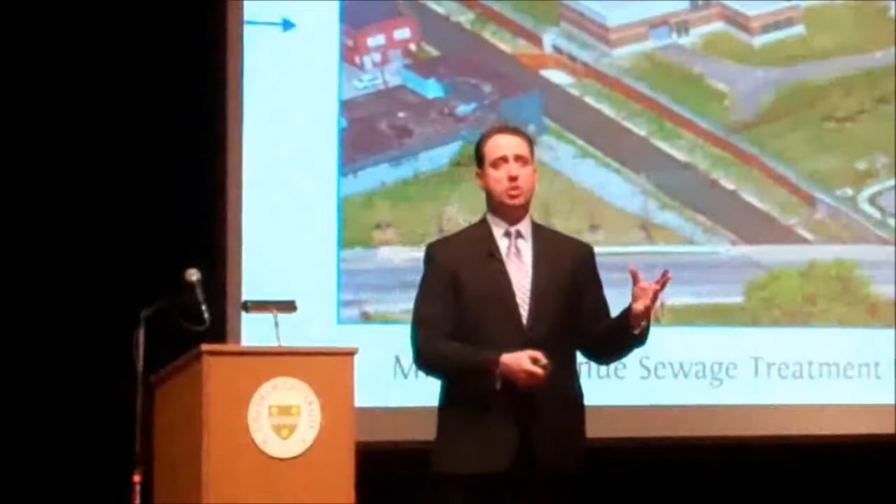This is not a decision that was made quickly, and this better way forward really came from the county executive serving as a city councilor in the early 2000s and late 1990s, where she strongly disagreed with the county's plans to build wastewater treatment facilities. These facilities are very expensive, $70 to $120 million.

I'll show you what they look like on the inside. The two circular areas are swirl concentrators, which is where they would swirl out some of the icky stuff that might be in the combined sewer overflows during wet weather events.

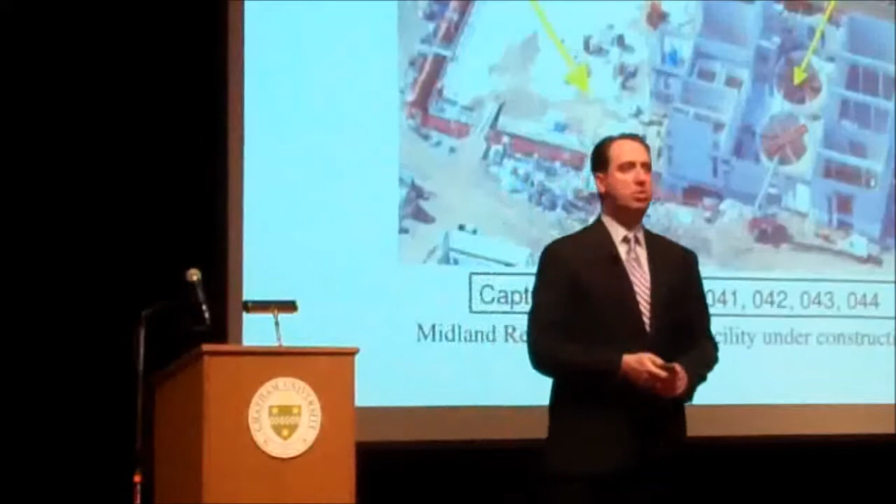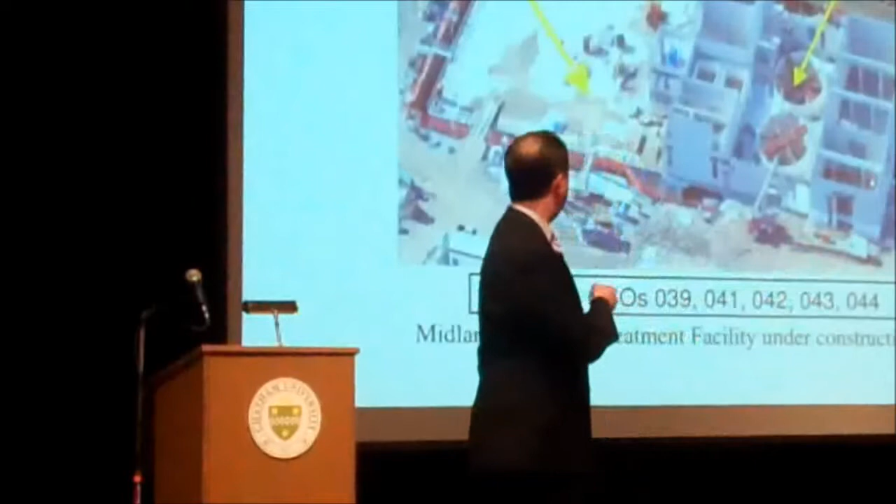And then the tank to the right is where they would dose it with chemicals and then discharge it into receiving water, which you can see right out here, which is Onondaga Creek.

So this one was constructed. We have a controlled subject. We can see what our future was, and here it is along Onondaga Creek, and this is what the conveyances look like that needed to be built to go to it.

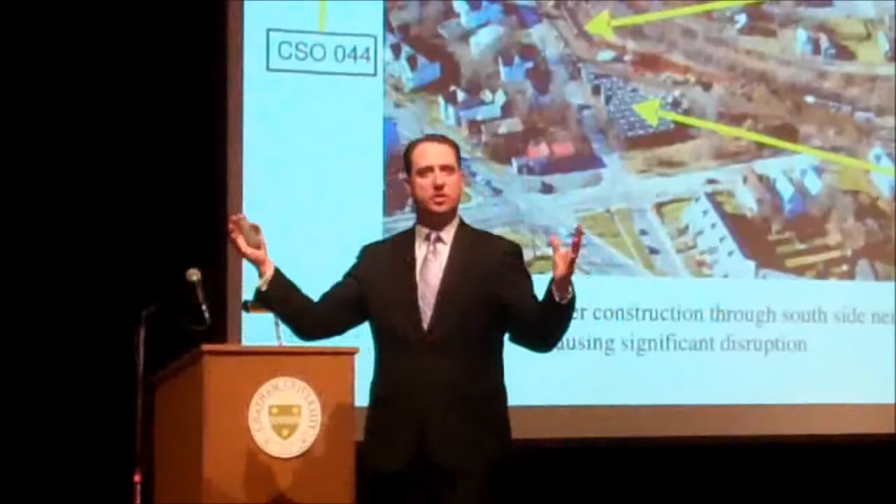Large conveyances, 12-foot diameter conveyances, had to go through neighborhoods to close off the CSOs and transport the wastewater to that treatment facility. This was very disruptive to this community.

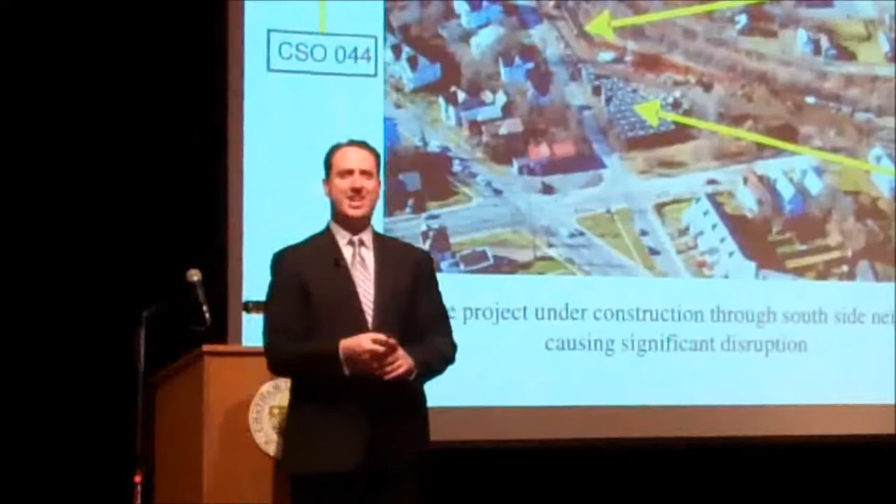The bedrock was so hard in places that they had to use dynamite to free it up and create the space for the pathway. And the county executive, when she came into office in 2008, said, enough, I don't want to build more of these.

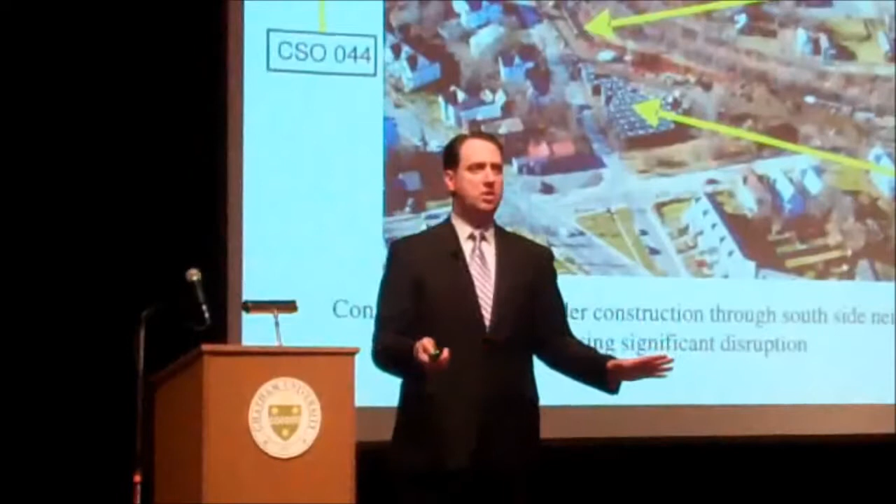One had been put out to bid in 2007 while she was running for office, and the contracts needed to be signed by January 4th in order to advance the $100 million construction project to go forward.

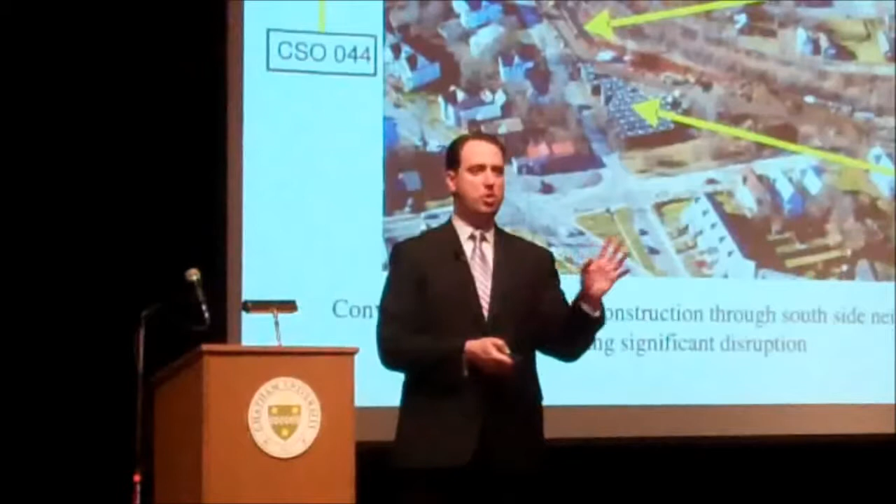I'll show you where it was a little further. She decided on her 4th day in office to not sign those construction contracts and petition the courts to find a new balanced gray and green approach to deal with our combined sewer overflow issues in the city of Syracuse.

So now our challenge is to really look at the gray and the green. I think it's very important, and this is why I put this presentation together this way, and I get to give it all over the place and talk about it.

The gray component is still very, very important to our success as a community. Anyone who suggests that green infrastructure is going to solve all the problems is really missing the importance of the gray components. And that really starts with smart gray investments that made our green program, which I'll get into, possible.

We made significant investments in our wastewater treatment facility. $173 million was invested on advanced phosphorus and ammonia removal. And that really positioned us.

At the time, we were very fortunate to benefit from things that we don't hear about anymore. I was talking to our friend from the Congressman's office here about potential federal funding. We funded this with an earmark. And I bet you we all wish those were around sometimes.

The greater good, I think we're better off because they're gone. But at the time, Onondaga County benefited from a very generous earmark to fund this improvement project. We were able to put it in place.

It's working now. The lake has recovered from phosphorus and ammonia contamination much faster than models had ever predicted. And we used this investment as an opportunity, the benefits of this investment, as justification to go to the courts and petition them to do a new program where we were able to suggest a gray and green combination rather than just the wastewater treatment plants that I showed you.

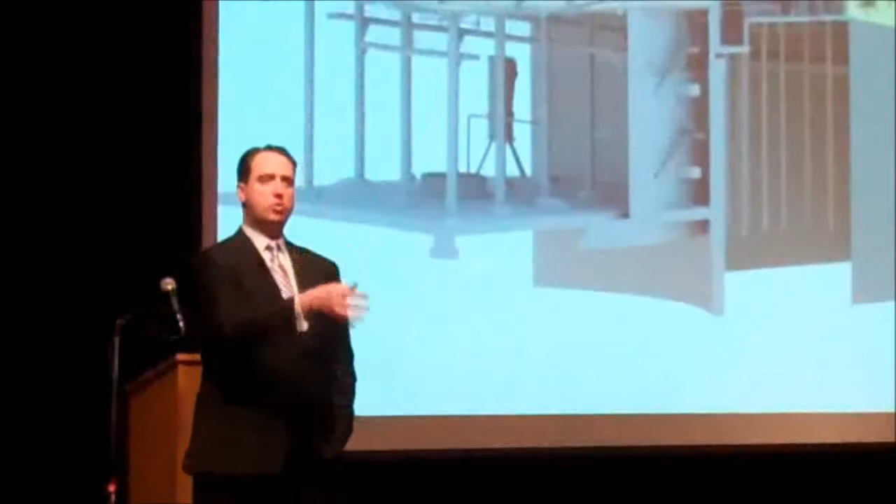This is in an area we're building now where we would have built one of those sewage treatment plants I showed you earlier, but instead we're building this underground storage system where we'll get 4.5 million gallons of the first flush of a combined sewer event through. We'll store it here during the event, and then when there's capacity at the wastewater treatment plant, we'll convey it down where it'll be treated with advanced ammonia and phosphorus tertiary treatment.

So these will store a lot of stormwater on a per-event basis, and this combined with a larger facility of 6 million gallons where we're doing a $70 million investment. I'll show you this picture.

This was an old parking lot, but this is where the third regional treatment facility was going to be built. My boss doesn't call them that—she refuses to. She calls them sewage treatment plants, and for all intents and purposes, she's absolutely right. They were sewage treatment plants.

This is the city of Syracuse's commercial corridor, where we have a Museum of Science and Technology. This is mixed-use housing, all retail, restaurants, a new hotel, a landmark theater. She just thought it was a bad idea to build a sewage treatment plant right next door to this commercial corridor that we invested all this time and resources in to build.

So instead, we're building this relatively significant 6 million gallon subsurface storage system. There'll be a pump station here, a control station here, and we're also working to implement green measures at all of our gray infrastructure projects when we can and when it's cost effective.

We want to make sure we're using the same principles on the green side that we're using on the gray side. We're going to capture all the stormwater that hits this site once it's restored, store it down here, and use stormwater to flush the system out after rain events.

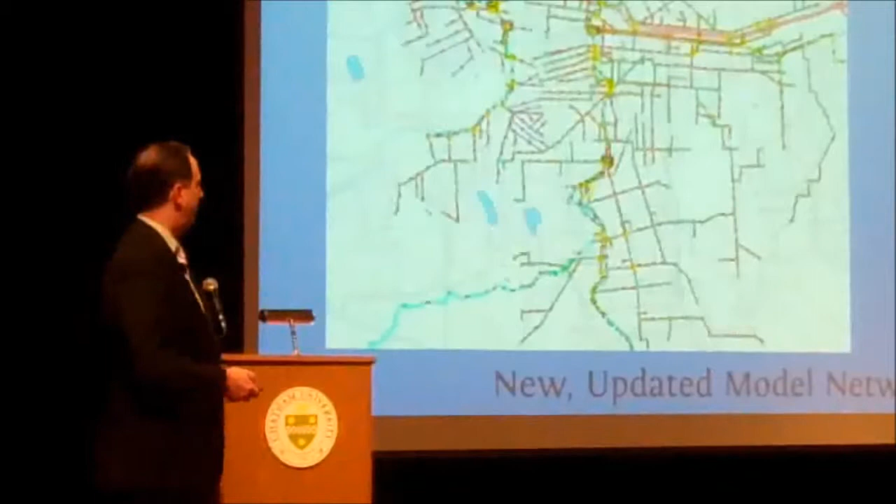We've enhanced it by adding additional data points, and now you can see that instead of - and we use the term node, but really that means data points, manholes, extensions of the system - so now rather than having 503 data points that drive our model, we've got 1,807, and we now look at our system as 456 distinct hydrologic subcatchment areas instead of simply 94.

Gets us to a level of granularity where we can really start to make water quality decisions based upon how water works within the footprint of our community.

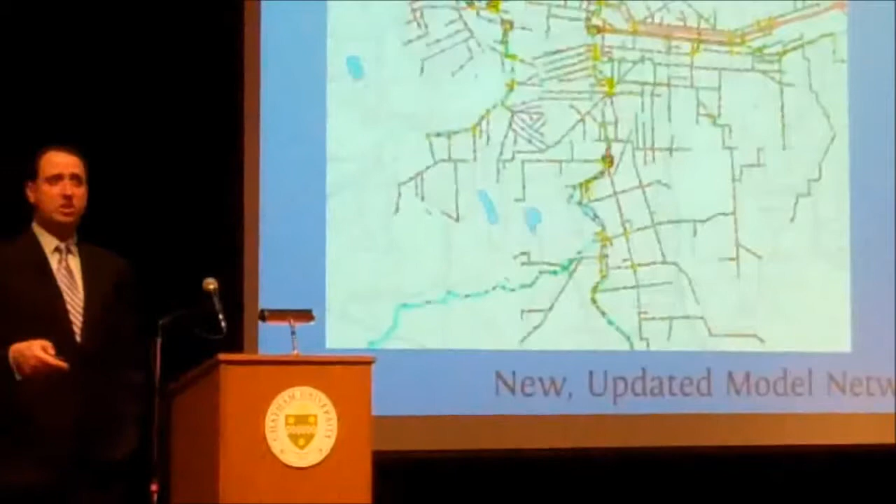We use georeferencing, USDA soil data, as well as impervious surface cover, which I'll show you here. So this shows the subcatchment areas - these are all subcatchment areas, which water behaves in a certain manner within that subcatchment area. And then this shows impervious surface in the city of Syracuse.

If you overlay them all together, you can start to prioritize where green infrastructure is more effective or less effective. And that's something that we've just gotten our arms around in the last few months.

So what I'm going to show you following this is what we've done leading up to this modeling discussion. And I'll get into a little bit how we plan to adapt our program to this technology now that we have it and we can use it to our advantage.

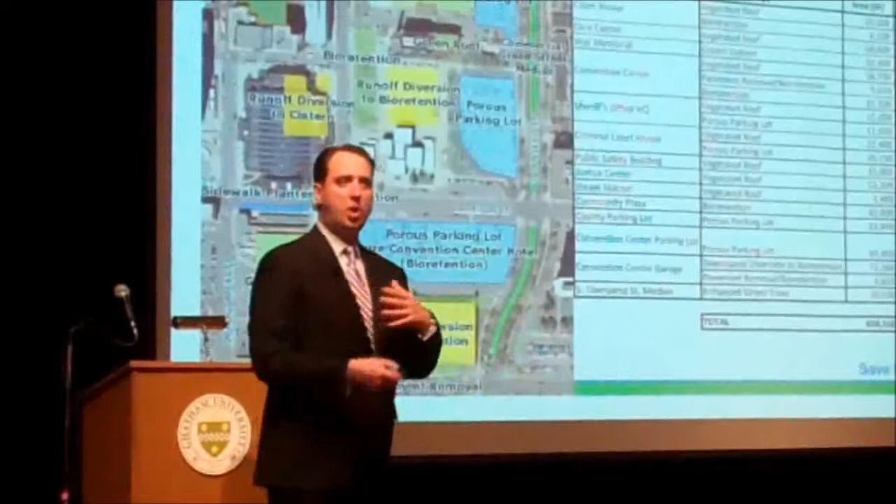So we started with a simple idea. We went to a federal judge in 2009, and this slide was in the presentation given to the judge. What we said was, what if we looked at this small slice of the city of Syracuse, where most of our municipal buildings are, owned by the county, parking areas owned by the county. What if we implemented these simple green infrastructure technologies here? Look at the effect we can have in a very small footprint within our city.

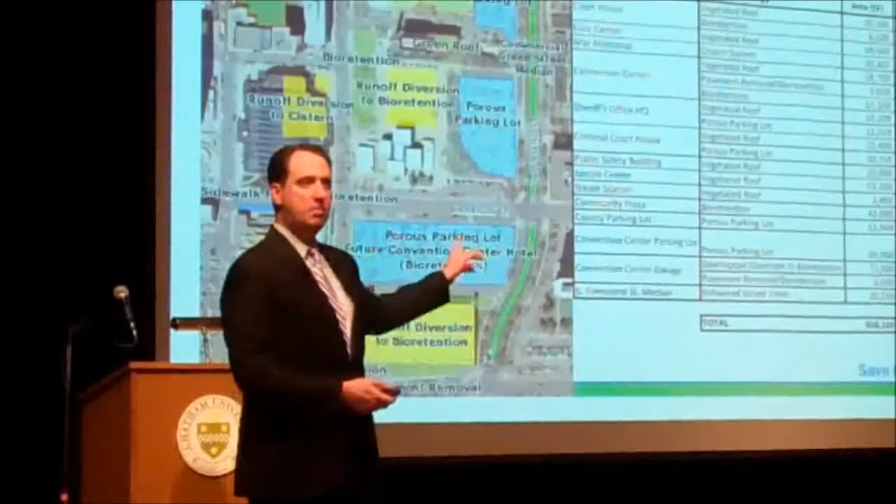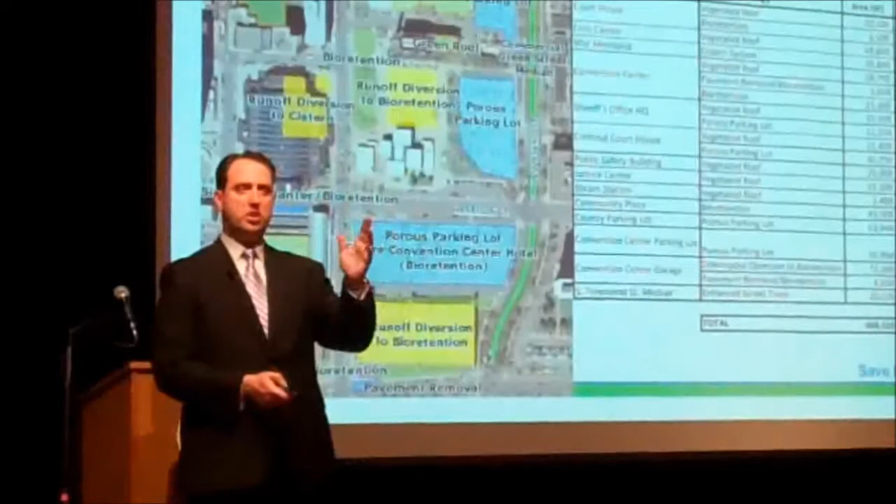We can get 10 million gallons in stormwater reduction simply by working in this small footprint. I think this was a very compelling argument made to the judge, and he really looked at this and saw the potential for green infrastructure deployment in a very small area. That was one of the solid pitches we made that got him to say yes.

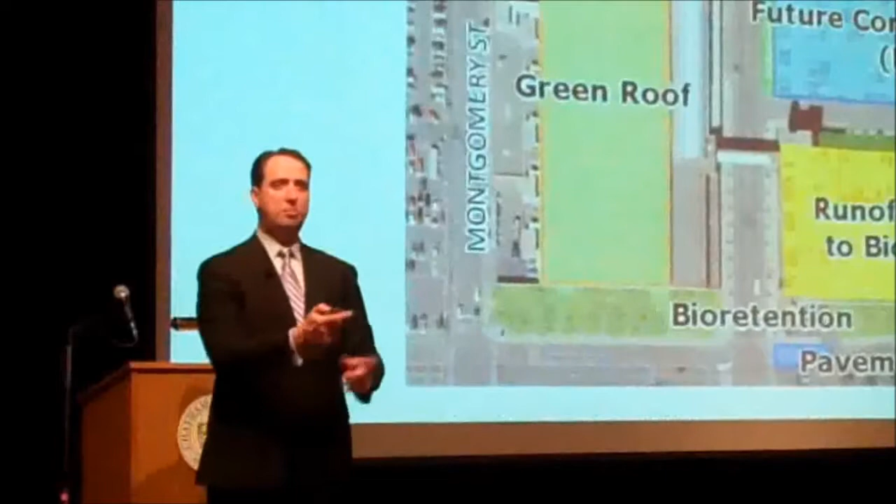So we got to work very quickly to implement this, because we wanted to go back and show him that we did what we said we were going to do. We said we were going to do a green roof on our convention center. In early 2011, we put a green roof on our convention center, 66,000 square feet. There's lots of flat roofs like this in communities like yours, where a green roof could be installed. Green roofs aren't necessarily the most cost-effective measure of stormwater capture, but there's ancillary benefits on heating and cooling to the facilities when you do put them in.

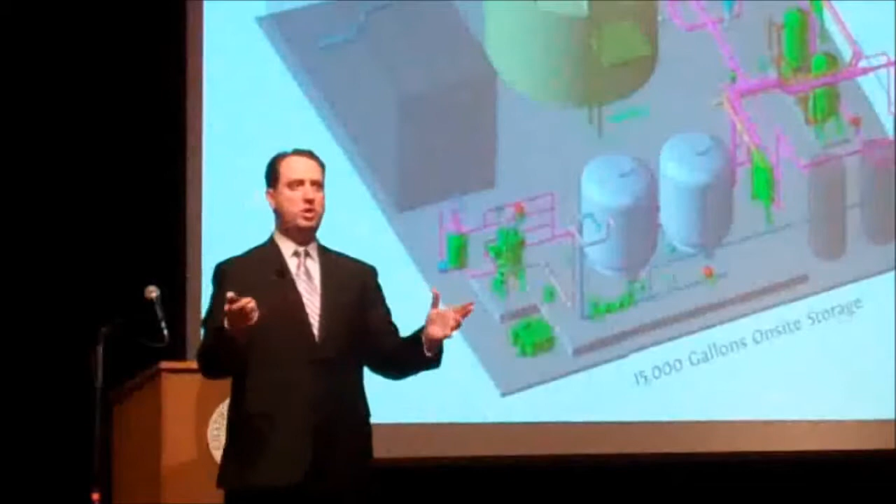We have a historic War Memorial Auditorium that we wouldn't want to do a green roof on, since it would damage its historic character, so we did cisterns in the basement instead. We built a system where we could store the water in the basement of the War Memorial Auditorium, and we now use it to make ice for our professional hockey team. We claim credit of being the only community in the country that has a professional hockey team that plays on recycled rainwater, which is pretty cool.

They're fighting for their Calder Cup championship now, so we're proud of our team, the Crunch, and they gave us a nice logo on the ice to highlight the program, so we appreciate the cross-branding. We also hope to use the water in the summertime, when the hockey team's not playing, for irrigation, potentially at the green roof if we need it, or on areas around the facilities. It's very easy to hook that up and use it for purposes outside.

Because we're using it for ice, water reuse gets to be a bit of a tricky issue when you get health departments involved. You can't just put water in a bucket and reuse it for something else. We put it through a pretty advanced treatment system, using UV disinfection as well as sand filters. It's virtually drinkable when it comes out, in case it comes in contact with any of the hockey players as they're out on the ice, so it's really clean when we put it out there.

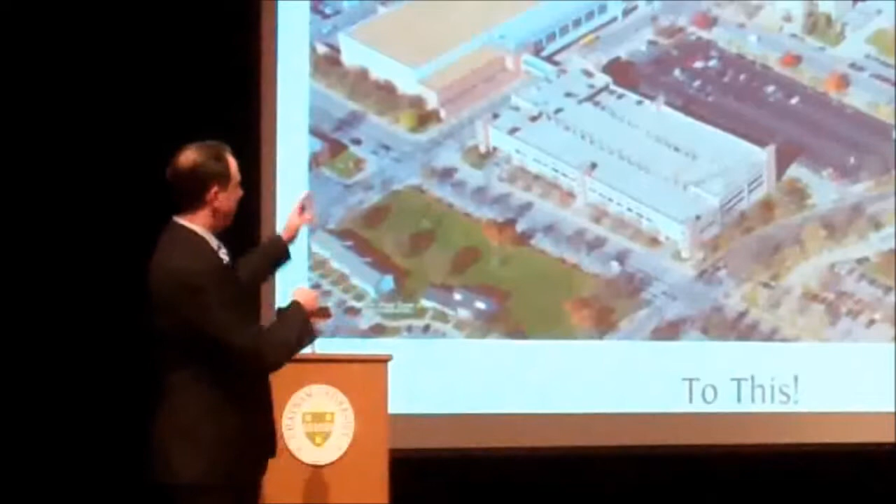So we went from our plan, when we said what if we could do all of these things, to having a nice concentration of green infrastructure projects right around all of our county centers. And again, this speaks to, we didn't really use our model to decide that we were going to do these. We don't know exactly how much CSO benefit we have using the new model versus the old model. But at the end of the day, these were all very sound investments. We're very proud of the work that we've done in these spots. And it really creates a concentration of green infrastructure in a spot where lots of people come to visit us and want to see what it is we've accomplished. And it's no accident that the county executive's office is right up there. She gets to look out now and see that we're doing what she asked us to in building the green infrastructure. So keeps the boss happy.

One of the things that we did in 2011, from the management perspective, to kind of break through some of the barriers that I think any community would run into when they're doing green infrastructure, because it is challenging and it is difficult. You've got cross-jurisdictional issues where people that worked in the sewer system for their whole lives are now working with people in parks, in DPWs, in county facilities, and it's not necessarily an environment they're used to, or it's not necessarily people that they've worked with before. So what the county executive did in early 2011, she challenged the whole team, and a lot of the team works in my portfolio within county government, so it's helpful, challenged the whole team to get 50 projects done in 2011.

Everybody looked at her like she was crazy at first, but throughout the year, working with our program managers at CH2M Hill, our management staff at our sewer utility, and the other department heads from the county or the city, they really embraced the notion of getting 50 projects done and ran with it, created excitement for it, really strove for it, and ended up getting 62 projects done by the time 2011 was done, and another 60 projects in 2012 because they built up so much momentum they couldn't even stop.

So now we've got well over 100 projects in the ground in Syracuse right now, and it really started with the county executive throwing a challenge out to her staff saying, let's get aggressive. Let's not do 3 projects this year, let's do 50, and let's see how good we can make them.

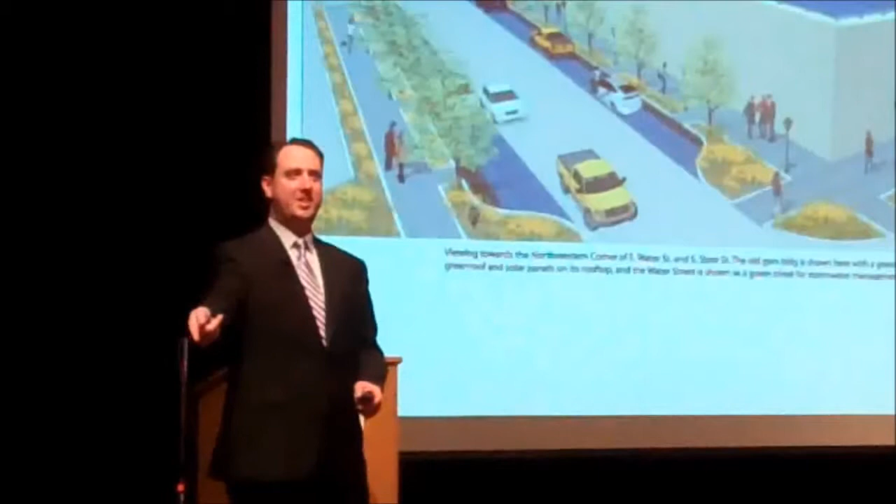They're all over the city, we're getting lots of capture out of them, but I'll show you one of our green streets here. This was one of the challenge projects we did. Someone brought this to us—this wasn't designed by anybody in the county. It was actually brought to us by the folks who sued us under the Clean Water Act and were successful in getting us to do this work. Then they came to us and said, hey, since we beat you, would you guys mind building this? And it's really not a bad plan.

So what you see here is just the expanse of what we did. We had deep root tree plantings, so all of those swales you see there on the natural side. We're not just doing urban plantings, we're doing plantings with deep root Silva-cell technology where you can get wide root expansion—I'll show you a picture of that a little bit later. But also the pavers you see there are all porous pavers, so we get a tremendous amount of road capture in the road bed because of the porous pavers.

Throughout the spring we got to see great growth here, and it really improved the aesthetic of this block and the aesthetic of the Erie Canal Museum. For visitors who go to the museum, they're no longer on an old, scary, uncared for city street—they're now in the middle of a great Save the Rain project with bike lanes, crosswalks, and a real sense that this community is benefiting from the investments we're making through the Save the Rain program.

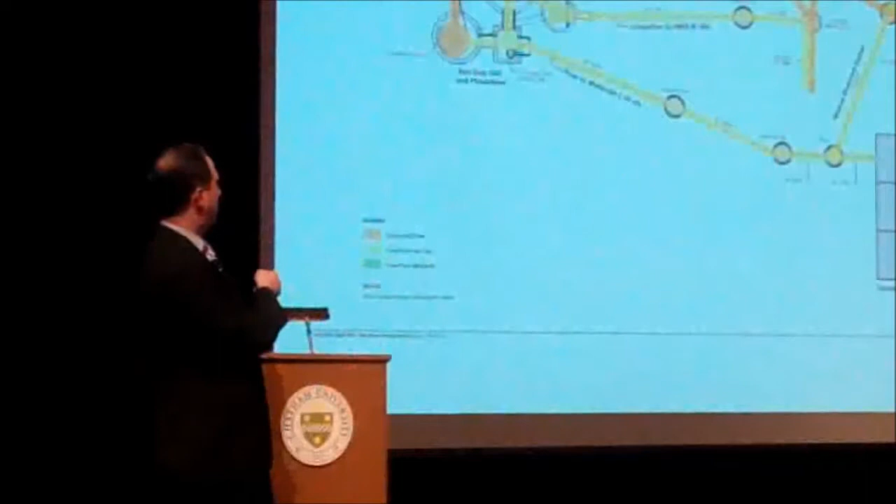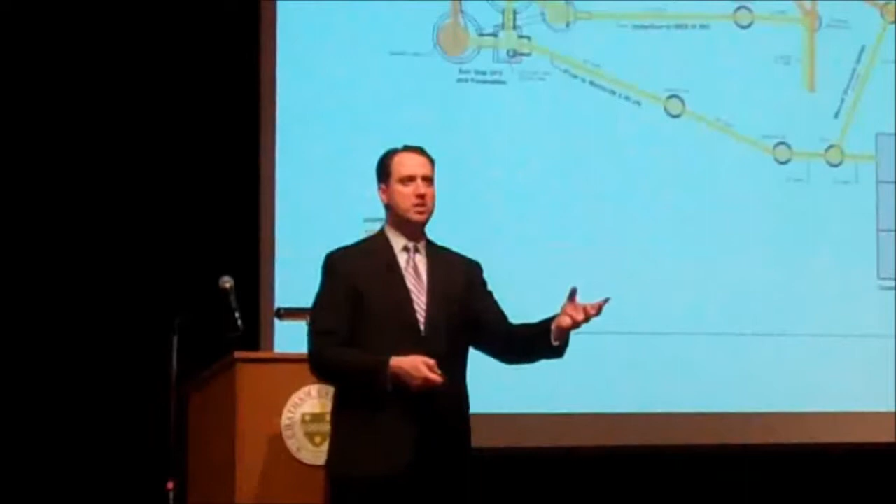We've persevered. We want to do the signature project. It's still an engineered solution where we're taking a diversion from an interceptor sewer, running it through 3 constructed wetland cells that have different approaches to passive treatment of the CSO outflow, to see how well it's going to do to treat the system, how much bacteria, suspended solids, and nutrients it may remove. We want to do that research under a permit from our regulator and go back to see if we can get this permanently permitted.

But it looks like green infrastructure to me. This is what it will look like when it's done. It's under construction right now. These are the 3 cells, and then it'll outfall into here, and this brook runs into Onondaga Lake.

Public-private partnerships are very important. We get asked a lot, are you doing anything to help the private sector? Absolutely. You probably can't be successful if you don't have a private sector partnership. And there's lots of opportunities to put green roofs on private buildings, and lots of opportunities to work on parking lots.

And we do a rain barrel program. I see one of your candidates for city council is here tonight with a rain barrel program. We have a rain barrel program in the city of Syracuse, and many communities have been very successful with them. One rain barrel isn't going to make a heck of a lot of difference. You're not going to solve your CSO problem with a rain barrel, probably not with 500 rain barrels. But if you get 10,000 rain barrels, you might start to see a measurable difference, and you can model that mathematically to see what the benefit may be.

There might be areas where it makes a lot of sense to do rain barrels, but more importantly, it gives people an opportunity to be part of the program, just like recycling. They get their recycling bins, they can have their rain barrel, it shows they're part of the solution. We've found great success doing community events where kids come in and paint the rain barrels, then raffle them off. We're also using them to promote social media—if people sign up for our Facebook or Twitter accounts and hit a certain number, they get a rain barrel. So there's lots of opportunities with rain barrels to help spread the message about thinking differently about wet weather issues.

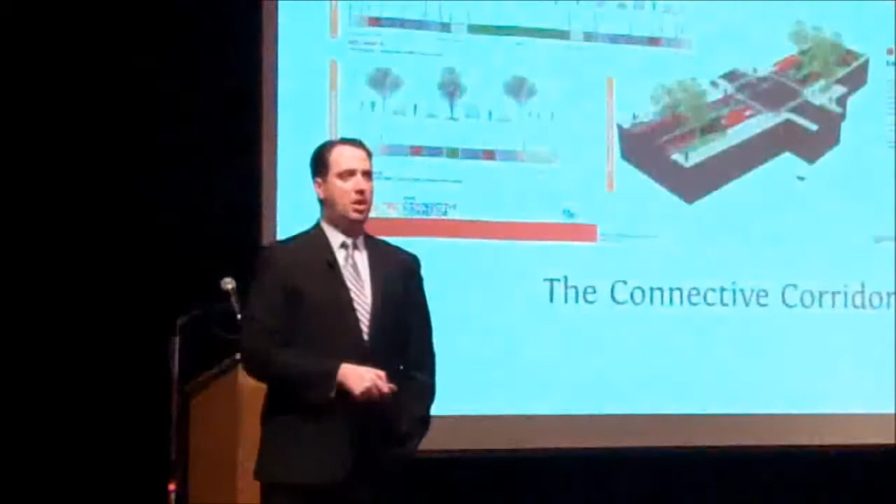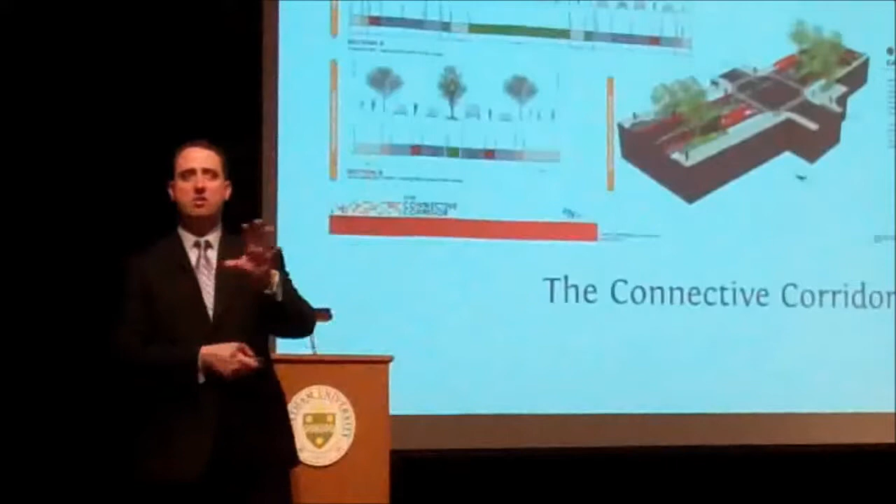One of our best public-private partnerships is with Syracuse University. I see you have plenty of educational institutions here to do something similar with. The Chancellor of Syracuse University, Nancy Cantor, wanted to connect the university, which was up on a hill, down to that Armory Square area where I showed you the storage project. She came up with this connective corridor concept, running down University Avenue and then down Genesee Street into the Armory Square area, with free bus service, to get the kids to really benefit from that commercial area we've developed and get them off that hill where they just congregated and caused trouble—let's get them down to the city instead. So this is our connective corridor.

We're really proud of the work done here, and proud of the fact that this was happening regardless of the Save the Rain program, but they were able to bring Save the Rain into their project and adopt some green infrastructure strategies, even though they were already moving ahead with this project regardless of what we needed to do with our stormwater projects or not.

That's why we're excited about what we're doing, because this is now Syracuse, New York. We have these kinds of investments, and this was done in partnership with the City of Syracuse, Syracuse University, and Onondaga County, all working together to really put together an impressive, complete green street.

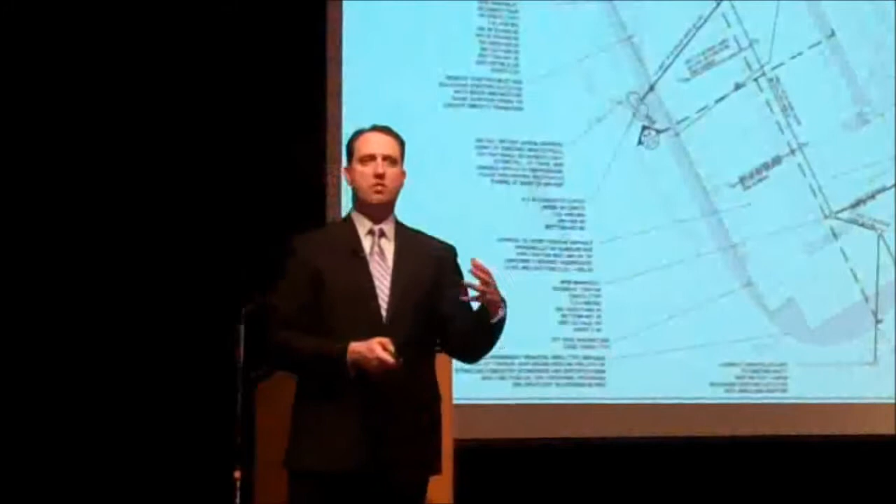This is a parking lot we did with porous asphalt. This shows the capture targets that we have. It's 100% porous asphalt, plus the yellow area that you see is where we took stormwater off the street and ran it into the parking lot. And then if you go to the website, this is where you can find the technical drawings and really see the details of what's going on in the subsystem of that parking lot.

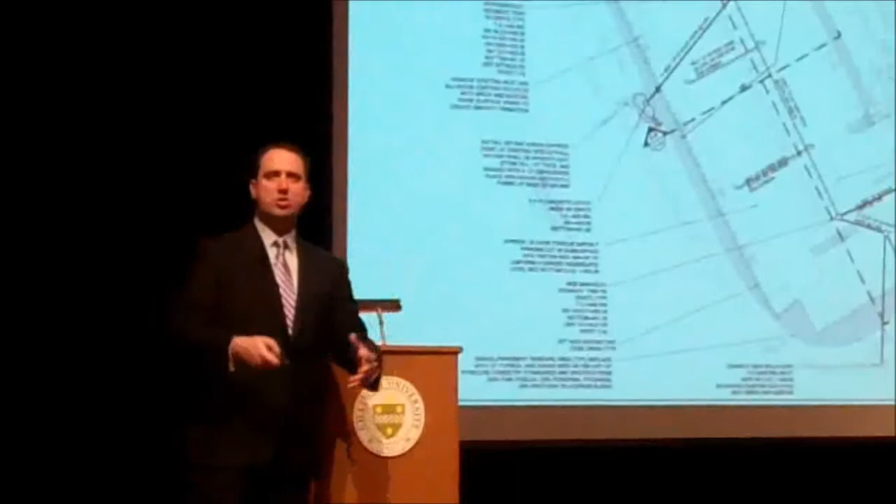How do we design the capture elements? What were the stone bases that we used? Is it number 3 stone? Is it number 10 stone? All sorts of tricky stuff that you might want to find out, or not - it's up to you. The fact sheets are there to talk about construction costs. That parking lot was $397,000. And what did we capture there? 1.28 million gallons per year. So there you have it - great investment.

Lots of stormwater capture. Maintenance. We're not worried about maintenance at all. I'm...

Kidding, no, maintenance is a huge challenge. It's even more so now because we have more than 100 projects in the ground. We have a real responsibility, particularly this year, since this is the first year that a lot of those projects are off warranty. We have to get out there early in the season with utility workforce, county facilities workforce, county DOT workforce, city parks employees, get out to all the sites we have and make sure they're picked up, given the once-over for spring treatment, and revisit them regularly to make sure they continue to perform.

We put together a maintenance manual for every single project we have, with checklists and the right approaches to maintaining a parking lot versus a bioswale versus a rain garden. It's all in there, available on our website. What we're really trying to do is make sure we can maintain the level of service over time for the investment we've made in these technologies.